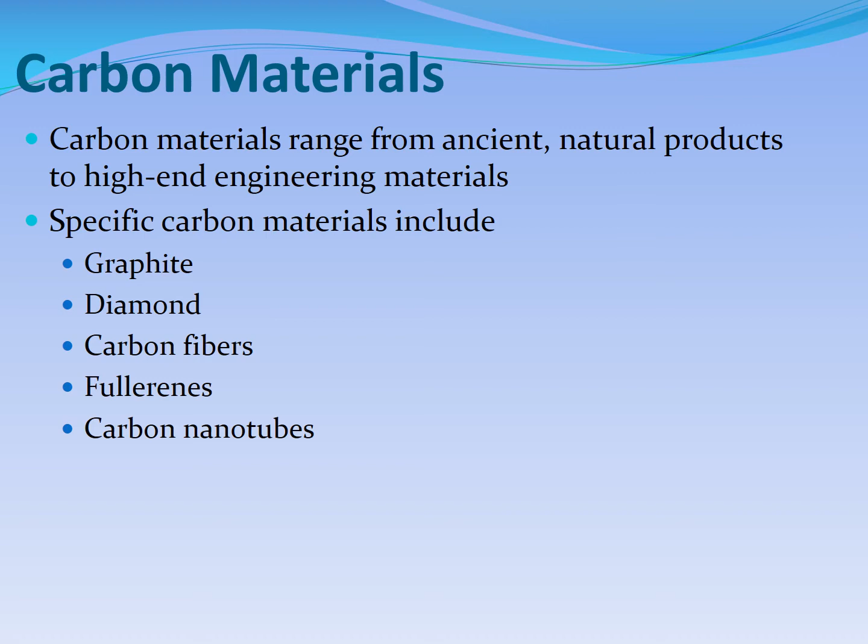Let us see. Carbon materials range from ancient natural products to high-end modern engineering materials. Specific carbon materials include graphite, diamond, carbon fibers, fullerenes, carbon nanotubes. At a basic level we have talked of some of these, but now we are talking of them again at a higher level. Graphite.

Allotropic means more than one structure. Like iron is allotropic: iron has alpha iron and gamma iron and so on. Carbon is allotropic because carbon can be graphite or diamond. So graphite is an allotropic form of carbon with 6-member aromatic rings in graphene planes. This type of ring you call a benzene ring, C6H6 and so on.

So the carbon-carbon bonds are strong, but the van der Waals bonds are weak, and it is highly anisotropic. Anisotropic means that properties in one direction are not the same as properties in the other direction. Because of these incredibly strong bonds, huge stresses are needed to break the in-plane bonds. There is a plane like this, another plane like this. In this plane the bonds are very strong, but bonds between the planes can be broken, so slip occurs easily between the planes.

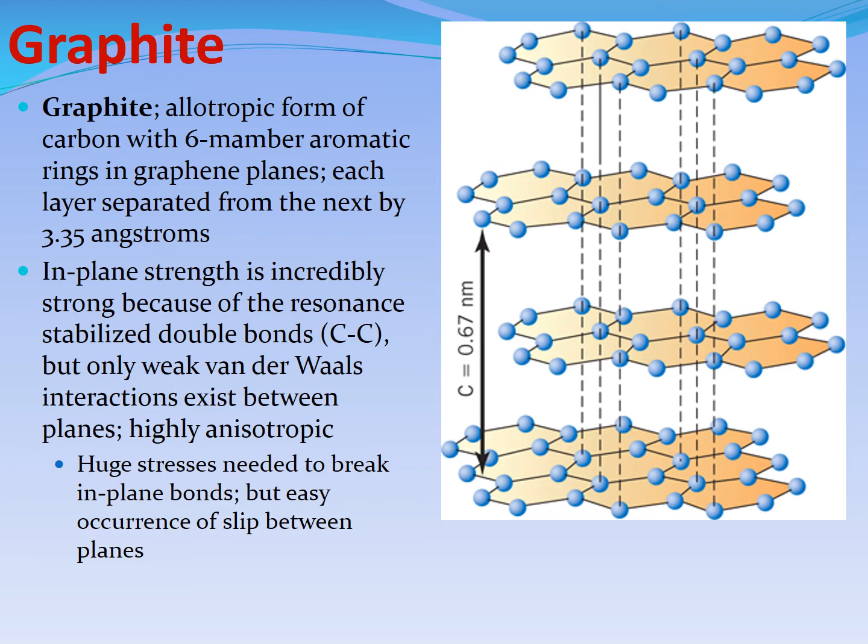You use graphite in your pencil. You put graphite sometimes as a coke material in furnaces for steels and irons. Graphite has the same composition as diamond, but is extremely soft, between 1 and 2 on the Mohs hardness scale. Mohs is a natural hardness scale; diamond is 10, the highest, and 1 or 2 is the lowest. So graphite is a solid material which can be used as an excellent lubricant and as a pencil lead.

If you want a liquid lubricant, you have lubricating oils and thick viscous oils. But if you want a solid one, for example in hot extrusion, there is big friction between the aluminum billet and the container wall. So before they push the billet inside the container, they spray some graphite powder on it. It is solid, not a liquid that would start to react. Then the billet goes inside and there is very little friction.

So it's an excellent lubricant. It is thermally and electrically conductive along the layer planes, but insulating in the direction perpendicular to the plane. So anisotropy: along the plane, very good conduction, but across the planes, almost insulation.

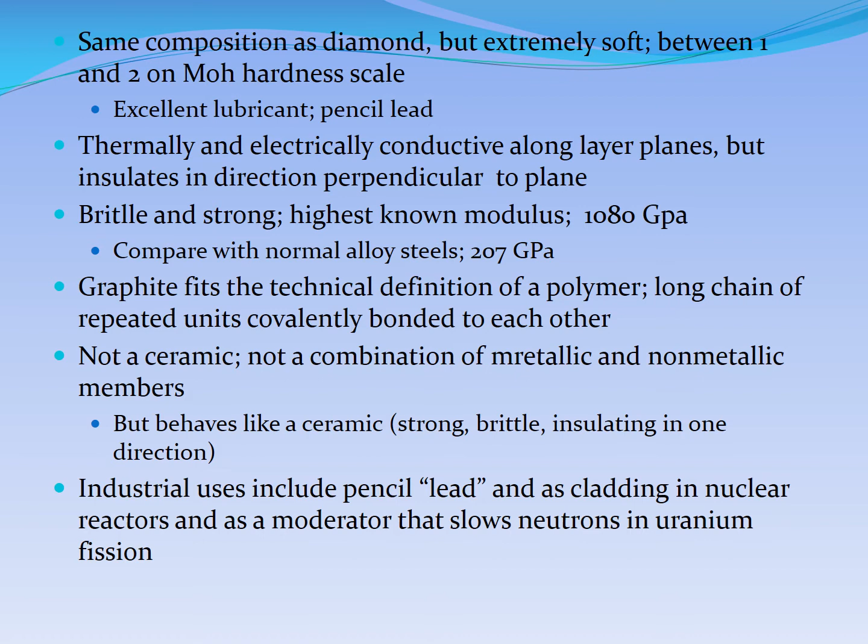So basically graphite, which is carbon chains, is a polymer by the way it is bonded, long chain, but by the way it is brittle, and it can be very strong, and it can be highly insulating in a certain direction. So it is a mix between polymer and ceramic. It is a polymer which behaves like a ceramic.

Diamond, you know, diamond is an allotropic form of carbon, forms a clear FCC structure, Mohs hardness of 10, can be scratched only by other diamonds, mostly colorless, but can have other impurities to make color. So diamond, the purest diamonds are crystal clear like glass, but there can be colored diamonds.

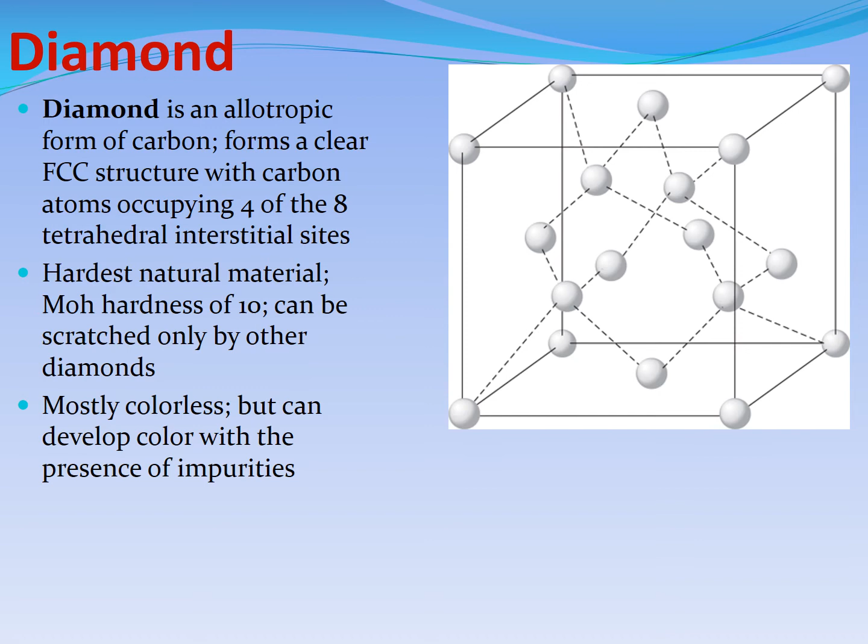Commercial uses of diamonds, of course, gemstones, all jewelry and so on, but industrial applications, right? So diamonds can have color, size, clarity. Most diamonds are not suitable as gems. Over 80% of all diamonds are classified as BORT, B-O-R-T, which means they cannot be used in jewelry and gems. So 80% of the diamonds are diamonds, but they are not good quality in terms of clarity and color and so on.

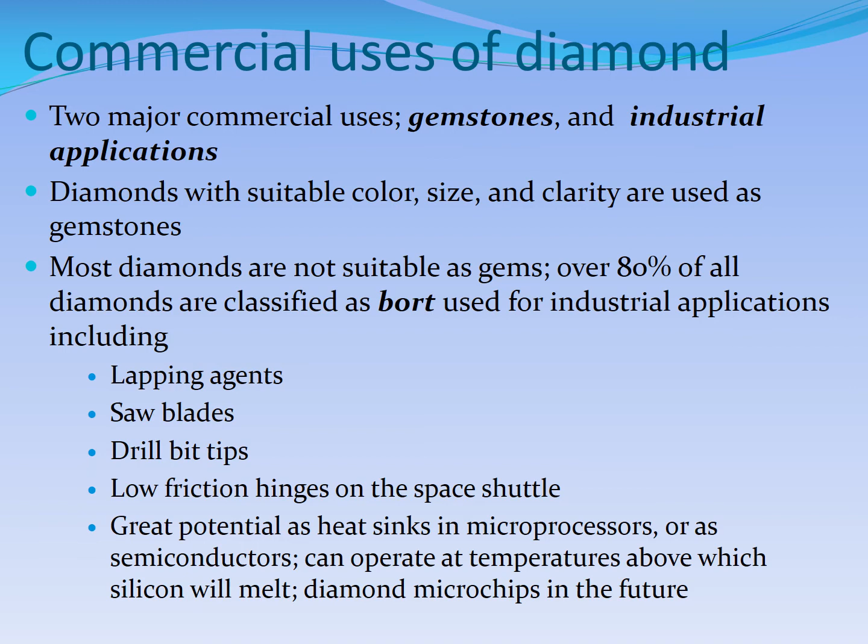So they are used as lapping agents in saw blades, in drill bit tips, in low friction hinges, space shuttle, great potential as heat sinks in microprocessors, in semiconductors, can operate at temperatures above which silicon will melt, and diamond microchips is the future. So more than 80% of all diamond produced naturally or by an artificial process is used for industrial purposes rather than as jewelry.

Diamond formation, it is there in Africa, South Africa, you know, high temperature, high pressure, millions of years formation of diamond. But otherwise it is just carbon. Graphite and diamond chemically are the same. Synthetic diamonds, right? Diamonds made in the factory. So this is huge. First synthetics in 1953. The biggest obstacle is the huge pressure, 55,000 atmospheres, 55,000 times the atmosphere, right?

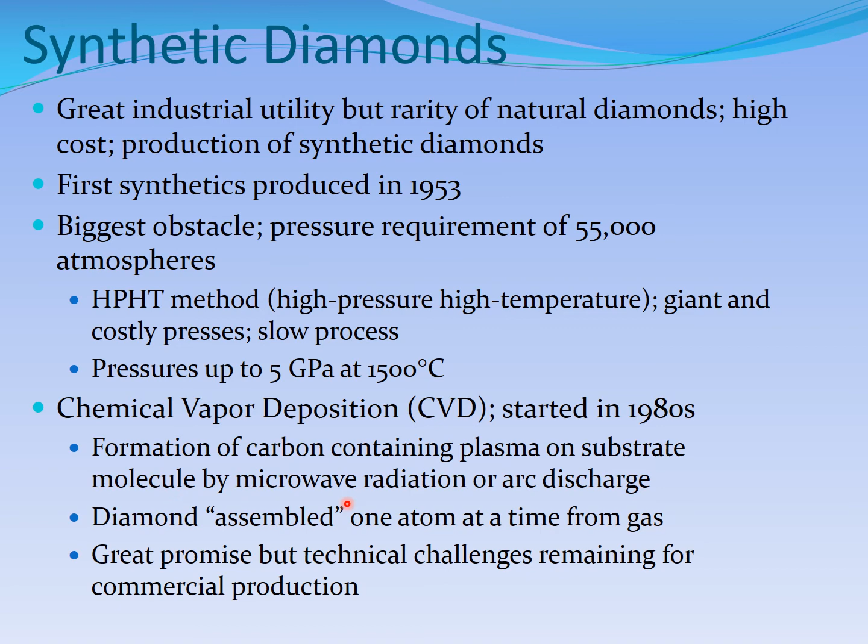So HPHT method, high pressure, high temperature. Giant and costly press, slow process. Pressures up to 5 gigapascal at 1500 Celsius. Chemical vapor deposition is a new process started in the 1980s only. So formation of carbon containing plasma on substrate molecule, then assembling and producing it. So these are now synthetic artificial means of producing diamonds.

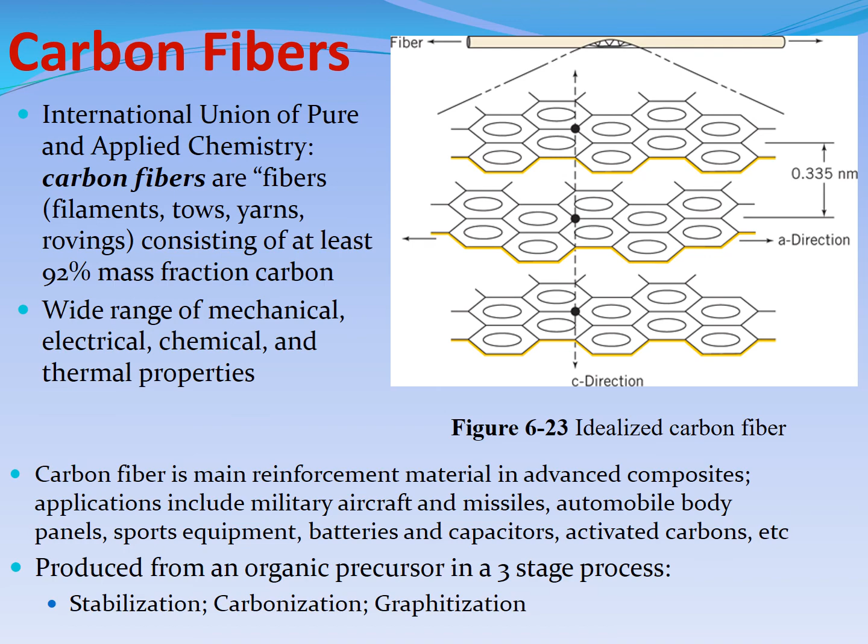Carbon fibers, not diamonds, carbon fibers. Carbon as fiber, threads of carbon, right? So just go through very quickly: stabilization, carbonization, graphitization. This is how we make carbon fiber. Glass fibers: if you can make fibers of glass, then you can make fiberglass. If you can make fibers of carbon, then you can make carbon composites, nanocomposites and fiber, right? So these are much higher level of composites in properties and so on.

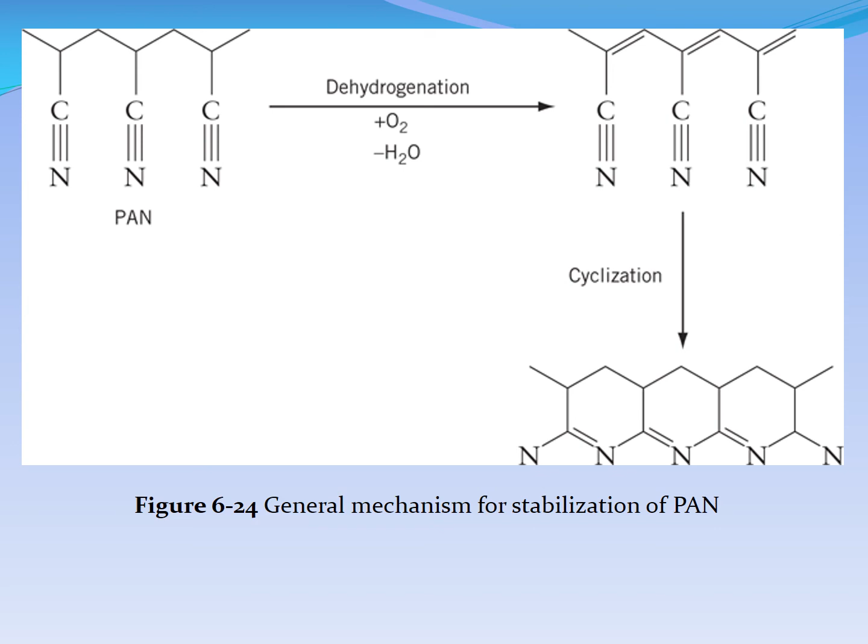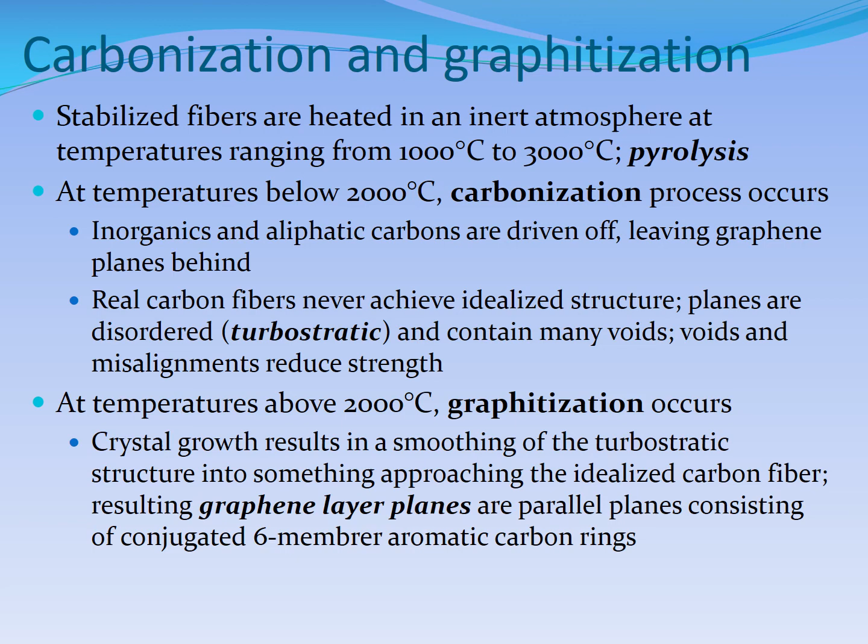So stabilization, what is the process? This is the general chemistry of the stabilization process. Carbonization, pyrolysis, carbonization, turbostratic, graphitization, graphene layer planes. So just quickly go through this, you will understand it. I have made slides which are easy enough to understand, and you can easily type it somewhere to find what it is.

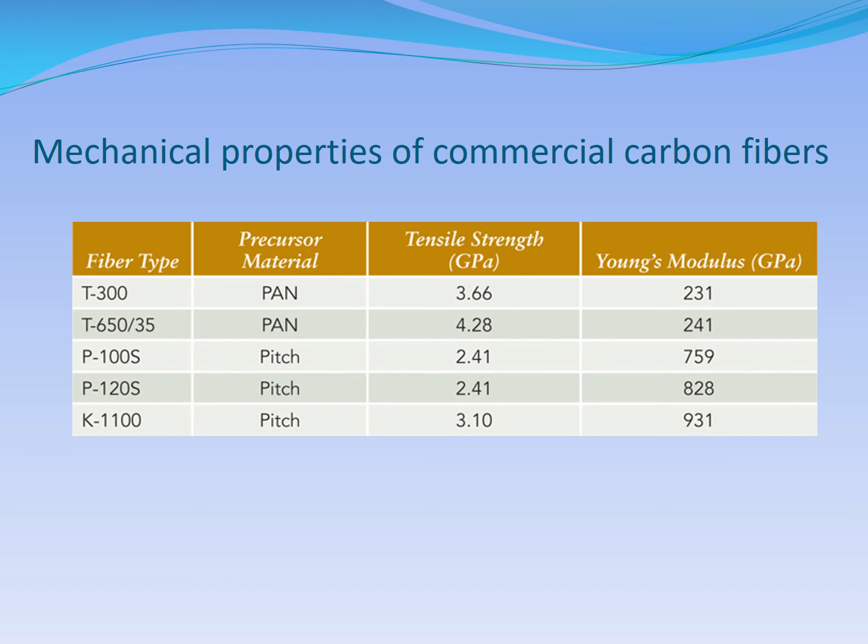Mesophase, what is pitch? What is mesophase? So this is again in the carbon materials. So quickly, mesophase pitch fibers are produced through melt spinning. We have done this in a manufacturing course, and these are advanced levels of carbon materials, right? So fiber type, and what are their properties in terms of tensile strength and Young's modulus and so on.

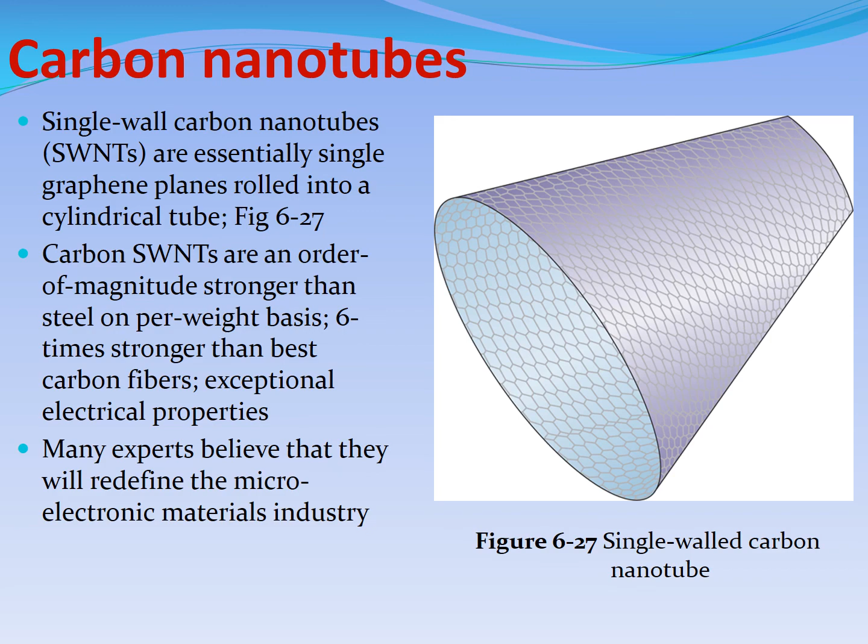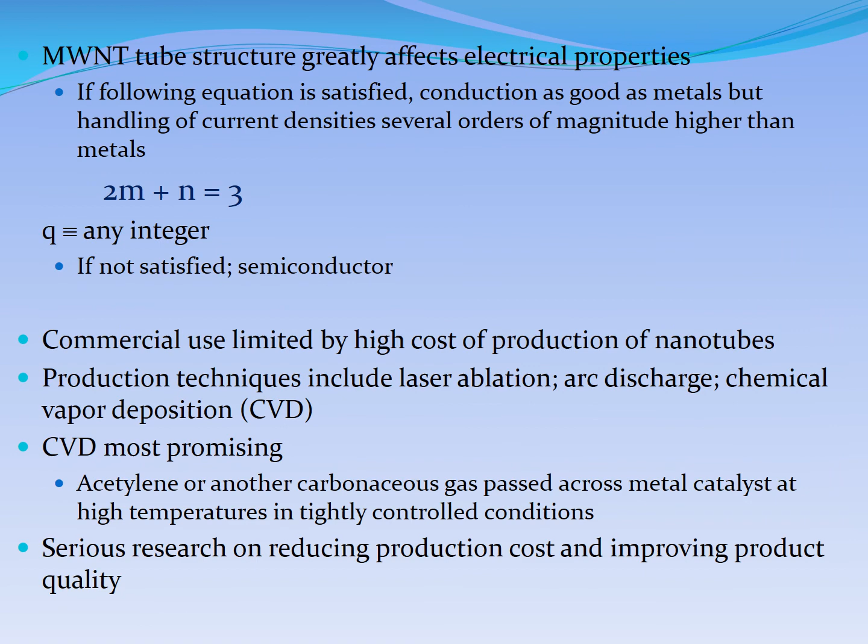Multi-walled nanotubes, MWNTs. What are these? They are nanotubes, but more than one wall. There is some equation, I will not hold you to calculations of these, don't worry.

And that ends the chapter for us, right? So I was a little fast in the end, but I just wanted you to have some idea of carbon materials which behave like ceramics. So these are very advanced. Carbon fiber composites and carbon nanotubes and graphenes and fullerenes are very advanced levels of materials, and we mentioned them earlier in the very first chapter. After this you can say that you can talk at least of some very modern materials.